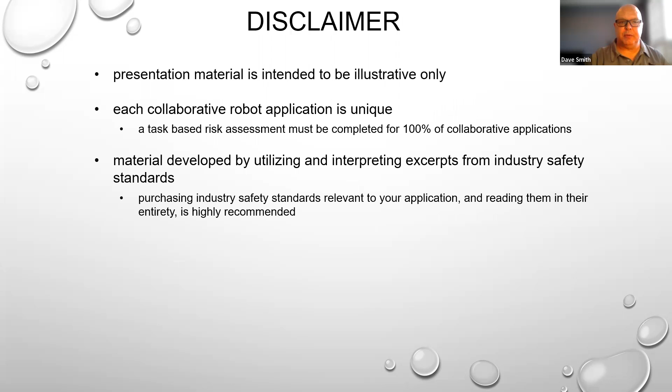Just a quick disclaimer, all this presentation material is illustrative only. Every collaborative application is going to require its own risk assessment. I developed these materials by utilizing and interpreting excerpts from industry safety standards. You're going to want to purchase those if you're going to implement a collaborative application and read them in their entirety. And check all relevant standards and regulations applicable to your robot application. Since I'm in Ontario, some of you might know, maybe you don't, we have a regulation in Ontario that requires us to have a pre-start health and safety review by a professional engineer licensed in the province of Ontario for all of our applications, cobot and other robot applications.

Just a brief history of myself. I started working at Honda Canada manufacturing in 1988. I started in production in the weld department. After a couple of years, I got a posting and went on to become the department safety specialist. Then I moved to assembly plant 2, where I was their department safety specialist. We have 3 plants there. And then I became, in the safety medical department, the corporate equipment and construction safety specialist for all of the 3 plants.

So I spent probably the last 17 years doing risk assessments, writing our internal standards, and trying to obviously make things a little safer. Since I started in 1988, we had some serious trouble. We had a lot of stuff that was unguarded. Hopefully you're not in that condition now, but if you are, there's definitely a way out of it. That's the good part.

And then after I retired at the beginning of the pandemic, I started my company called Cobot Safety, and I'm the owner and lead auditor and technical trainer for that. A little bit of my professional development: I'm a CRSP since '99, and I'm a registered functional safety technician. I am a health and safety professional. I don't pretend to be an engineer. I have a fairly good understanding of it. But if there's any questions I can't answer today, I can certainly get you the answer from other people that are on my committees.

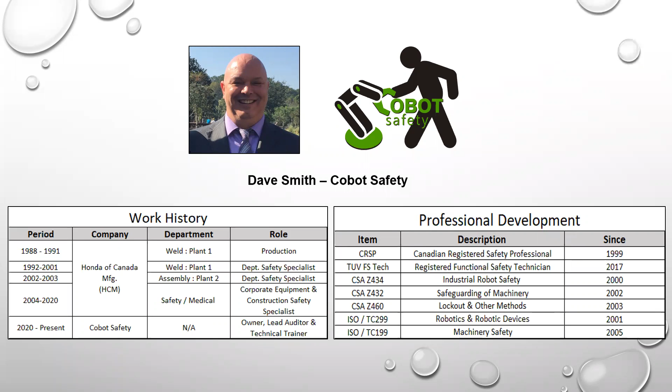So the first thing we wanted to do is just a pre-training baseline exercise, just to see how much you know about some of these items we're going to talk about today. So hopefully you can see those questions that are being posted right now by the facilitator. So the first one is, which CSA standard applies to industrial robot safety? And it's one of those. Okay, so it looks like we got a little bit of work to do, but we had 58% of the people that knew that. That's good.

And which ISO standard applies to industrial robot safety? So the first one was which CSA standard. This is which ISO standard. Okay, again, so it is 10218. Most of the people knew that, but again, this is just a pre-training baseline. So this is good. We're going to talk about that, and I'm going to give you some more information on that so you can understand where the standards came from and where they're going.

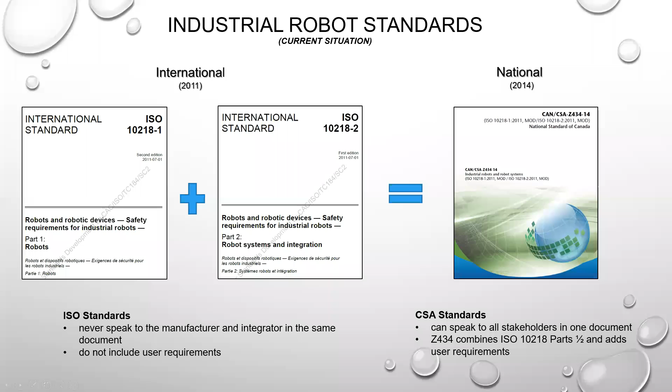Then as soon as we introduced collaborative robots in 2006, the concept of it, and when we started that, we didn't even really know on our committee, to be honest, other than some manufacturers. It was almost like writing science fiction. We didn't exactly understand what a collaborative robot application or a collaborative robot looked like. We spent most of our time writing standards to keep people away from the robots, and now the person is going to work with the robot.

So after the documents, especially part 2, was not issued until 2011, as soon as we issued those, we had a lot of questions about what is a collaborative robot, how do we implement these applications. So we wrote a technical specification that we published in 2015 that we worked on for 2 or 3 years after we published in 2011. Again, the goal is just to provide more guidance on collaborative applications. And the requirements of this are going to be incorporated into the next version.

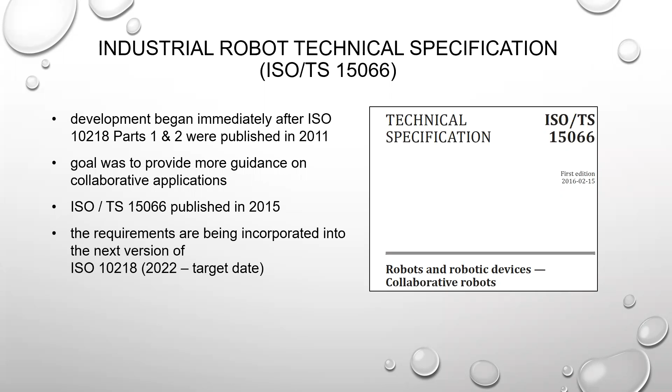And that's where I'm going to just quickly show you here. Hopefully I put these in the handout so you can look at it if you're interested, but we'll skip over it pretty quickly. Basically, the 2 parts we had now, 2011, parts 1 and 2, they're going to be combined...

With ISO TS 15066. We also wrote a couple of technical reports that only provide guidance, not requirements. So we basically took all of these documents and we put them into the next version of 10218 parts 1 and 2. Those two documents right now are at the FDIS, which is the final draft international standard. So we can't make any more technical changes, and we're hoping those are going to be out in 2022. We have, of course, had issues with pandemic and virtual meetings like everybody else.

Those two documents will come back to North America. The R15.06, the American committee, is going to adopt them, as well as Canada. And again, in North America, we're going to work with the Americans to develop user requirements.

They're going to add a part 3 to the standard, but in Canada, we're going to try to keep it all in one document, either as an informative annex or a normative annex, which means you have to follow it. So in Canada, we like to keep all of our documents and all of our parts in one document if we can, just for ease of use.

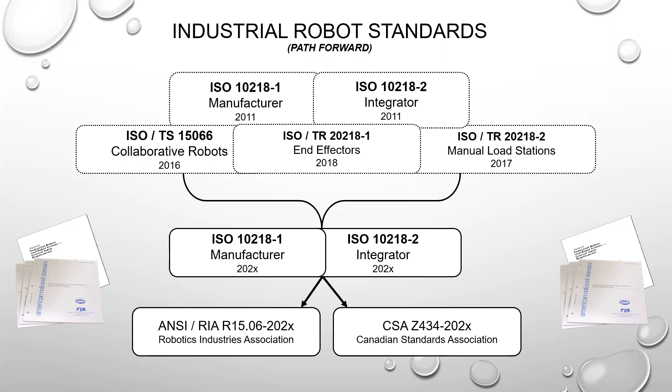So we talked about, is there any such thing as a collaborative robot or cobot? Many of you answered no, and you're actually right. This is really interesting.

As I mentioned, we didn't even really understand collaborative robots in 2003 or 2004 when we started writing this, and we continued to learn. I think the manufacturers had lots of information, but as you can imagine, with the new technology, they weren't really sharing because we have several competitors on the committee.

So we did define the collaborative robot in ISO 10218 Part 2, and we defined it as a robot designed for direct interaction with a human within a defined collaborative workspace.

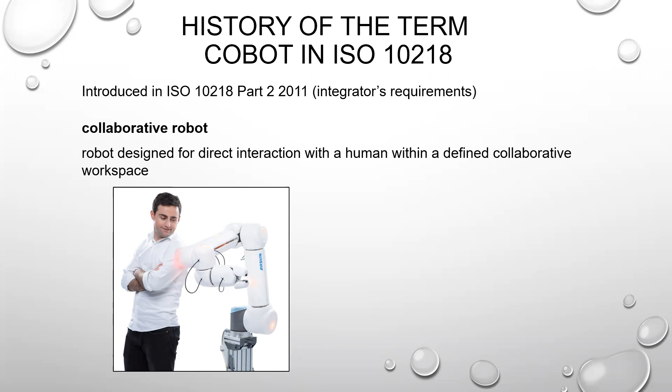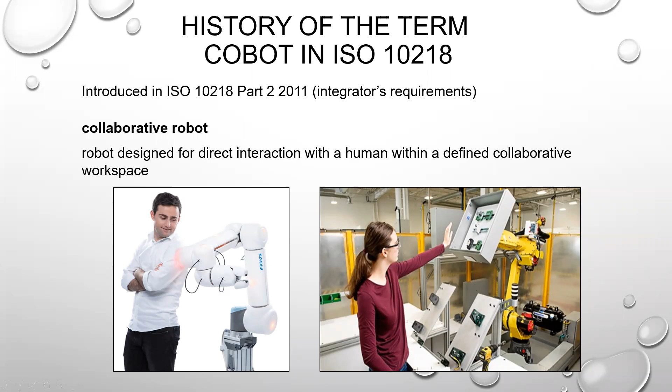It's simply a type of industrial robot. The application is critical, not the robot.

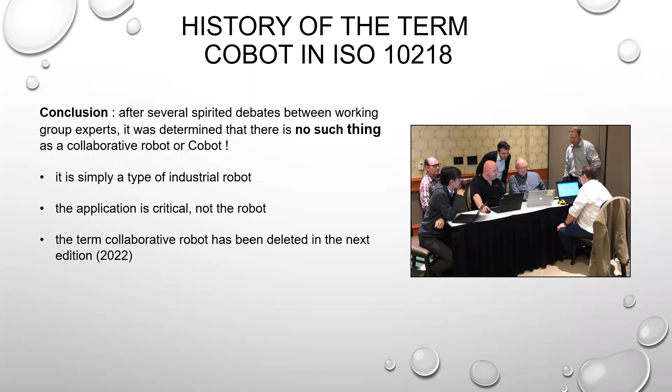The term collaborative robot has been deleted in the next edition, so we don't talk about that in 2022. I did come up with a definition that we proposed as the Canadian delegation that never made it in, but most people agree that it is probably the most apt way to describe this.

So it's really just an industrial robot with safety features that make it suitable for integration into a collaborative application. Again, that definition is mine - it wasn't accepted by the committee, but we talked about it in our meeting this week for the Z434, and most people agreed that it's an apt description. So again, it's not the robot, it's the application.

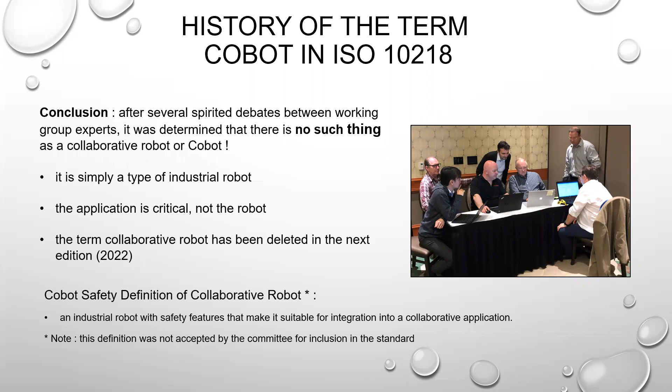There were some key points in TS 15066 when it came out. The robots utilized in a collaborative manner must comply with Part 1 and Part 2. So the robots themselves are manufactured to Part 1, and then the integration has to meet Part 2. This specification was developed to supplement and enhance those requirements.

It provides additional guidance with respect to collaborative operations. There are 4 types we're going to talk about, and it also introduced threshold values for power and force limiting applications.

We're going to talk about that because that was one of the biggest things when we started discussing collaborative applications. Somebody said, okay, well, how hard can we hit somebody with a robot, or how much force? And then of course that would depend on the body part that you hit and all kinds of different things.

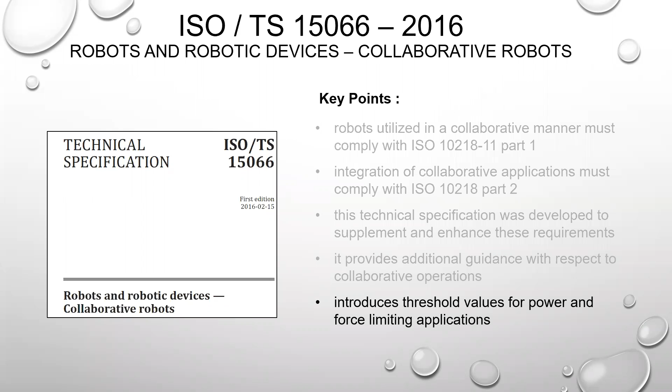So as soon as we introduced this, there was a lot of big companies, including Honda - that's why we're participating - and Mercedes and other companies around the world in automotive that really needed some additional guidance. So that's why we created this.

The collaborative robot's industrial design and operational characteristics are obviously much different than those for a traditional installation. The operators work closer to the robot. You can have intended or unexpected contact.

Those can actually be intended. So if it's a power and force limiting robot or a hand guided application, we're going to be right up close to the robot, even moving it around by hand. So obviously that contact is expected.

And the risk reduction measures had to be determined in a risk assessment. Risk assessment is always important.

I think anybody that understands safety nowadays understands that almost every standard, every workplace, every government regulatory authority always wants to see risk assessments, because there's a lot of value in doing them, and doing them as early as possible.

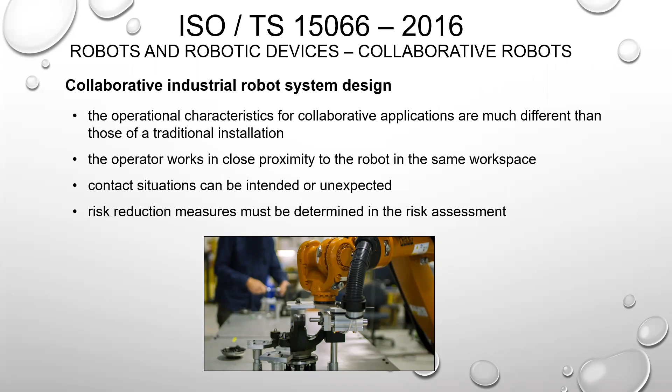With a collaborative application, it's absolutely critical because, as I mentioned, there's no prescribed method to follow. Every application will kind of rise and fall on its own merits according to the risk assessment.

So there are 4 types of collaborative operation: power and force limiting, speed and separation monitoring, hand guiding, and safety rated monitored stop. The two that are most prevalent are power and force limiting and speed and separation monitoring.

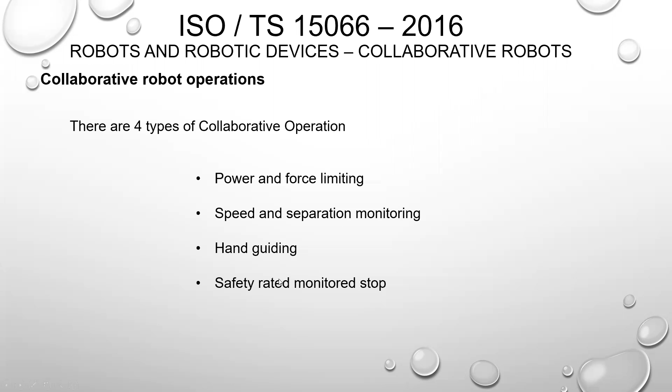We'll talk about all of these types. So the first one here is power and force limiting. I'll just show you a quick video of a polishing application.

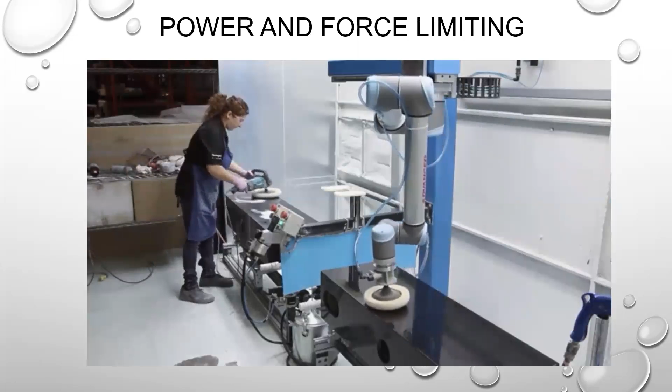This is a universal robot. I'll show a few of these, but I have no ties to any robot manufacturer or anything - they happened to provide me with some videos and I was able to get some offline. So these are just illustrations only.

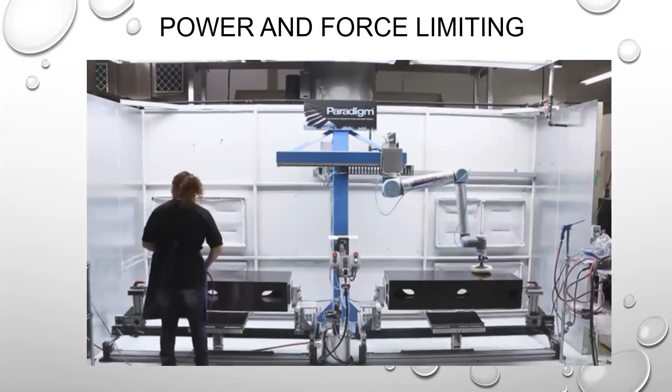But you can see that the person can work in close proximity to that robot. We're going to show that in a risk assessment, and after that we'll have a brief question break, and we'll talk about that a little bit more.

So with power and force limiting, physical contact can occur between the robot and the operator, and again, it can be intended or unintended. There are two types of situations for contact that we talk about in TS 15066: quasi-static, so is somebody going to be pinched or clamped, and transient contact, which is more dynamic contact where they can retract and recoil. We'll talk about that because the force limits are different. So contact can occur in intended situations, unintended contact caused by an operator, or unintended contact due to a technical failure. Those are the things we need to consider.

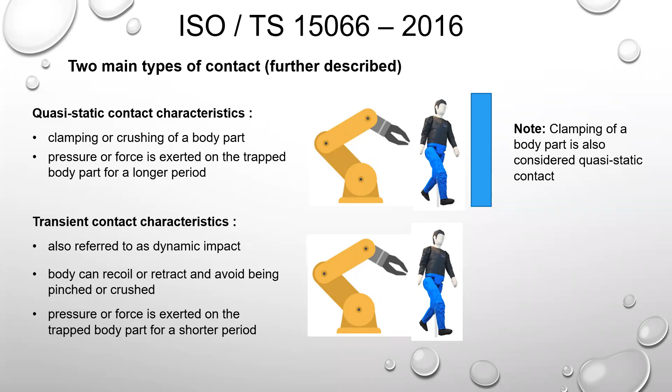The risk reduction measures to prevent the contact between the operator and robot - basically the key is to ensure the contact doesn't result in harm, because as we already said, it can be intended. So we have to identify all the conditions that could result in contact situations. The standards always ask you to look for things that are intended or reasonably foreseeable. Reasonably foreseeable is kind of a vague term, but basically anything that you could reasonably foresee going wrong - how would we protect the person if that happened?

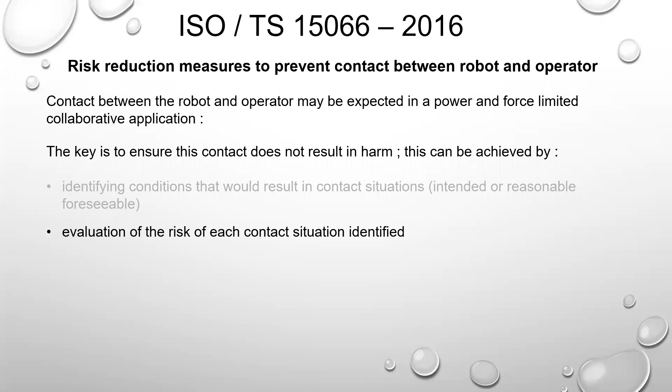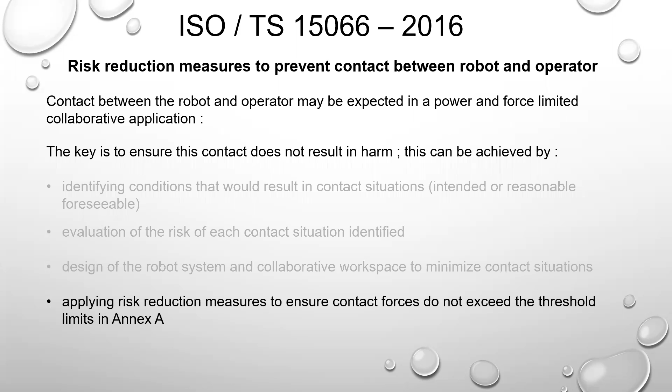Evaluation of the risk of each contact situation. Design of the robot and collaborative workspace to minimize the contact situation - this goes back to the design stage of our risk assessment. That's really critical, and we have to apply the risk reduction measures to ensure the contact force doesn't exceed the limits in Annex A. We'll talk about those when we get to that.

Force gauges are how we measure the force. This is important - once you measure the force, you have to make sure that it meets the guidelines in our table. I'm going to talk about it a little bit later, but if I forget to talk about it, I want to talk about it now.

Change management with all of the programmable safety systems - and this goes to any type of automation. When you're using safety PLCs now, and we used to mix machine and safety functions together in the same PLC, we had one of our operators get his head pinched between a jig and a lift. Luckily we were able to lift the jig up against the force in the air cylinders to save them. But that was a result of us mixing machine and safety functions in a standard PLC and having everybody, all our maintenance people and engineers, have access to them.

So we had a near miss. Somebody went to change some parameters and created another condition which said bypass the light curtains when all these conditions are met, and this person was in the way. So that's what happened - we almost killed a person. It becomes so critical when we start talking about collaborative applications.

So if I'm going to set all these power and force limits, in Ontario I need a pre-start engineer to come in and validate that. After I validate it, I have to make sure that nobody changes it. So at Honda, we started what we called a safety device alteration procedure, where management would have to initiate a change to any programmable safety feature or device, or even hard guarding.

Then two authorized people would have to make the changes, and they'd have to be approved by device because we had different types of safety PLCs. So anyways, we went pretty far with that, but that allowed us to do change management, in particular with pre-start health and safety reviews as well. We didn't want to have to keep calling the engineer in, so after we validated it, we wanted to make sure - but just a very critical point, because all of the safeguarding now, a lot of it with programmable axis limiting for robots and stuff, is invisible. So if something happens or changes, the operator won't know until something goes wrong.

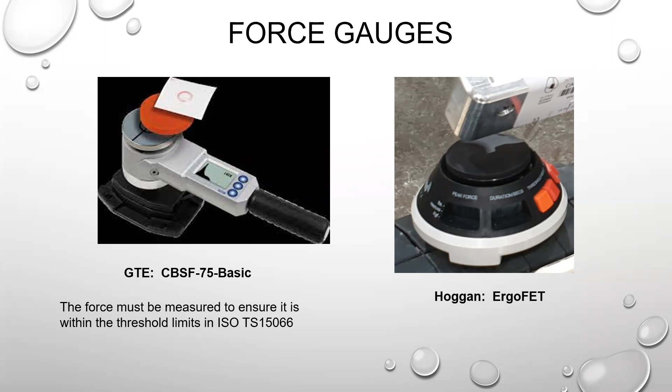This is just a quick example of a collaborative application that we did at the Toronto Auto Show. The interesting thing is that we actually approved the application in our safety group, and I have a few members from Honda that were on the committees with me, so we all had an evaluation of it. We selected a couple of robots that were URs, but our engineering group found a deal on some other robots and bought those. When we came back from our ISO meetings, we realized they had selected the wrong robots and they didn't have the right features to use in a collaborative application. So we had to send them back, and we proved that out by showing our risk assessment to our senior management team, and then they agreed.

So the kids could come right up here. They put the magnetic stickers right onto the robot, and then the robot would go over and put them on the car in whatever pattern the kids were selecting.

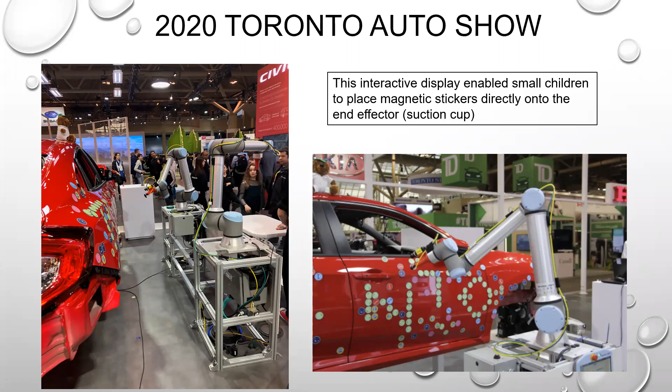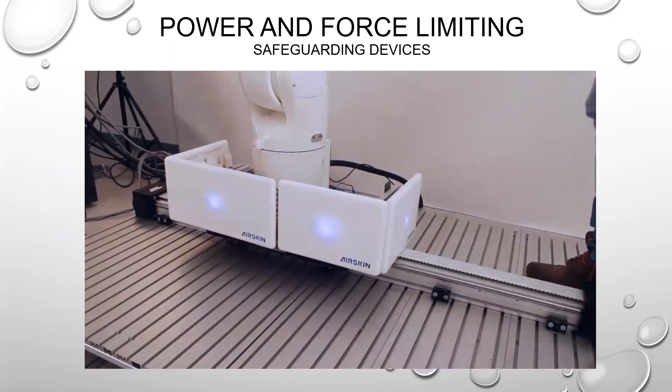This just shows a quick video on some power and force limiting safeguarding devices. Again, I have no relationship to any of these people, and I don't know how often you would use these. There are probably other ways to do this as well, but if you're going to have contact with an operator, you could use this Airskin.

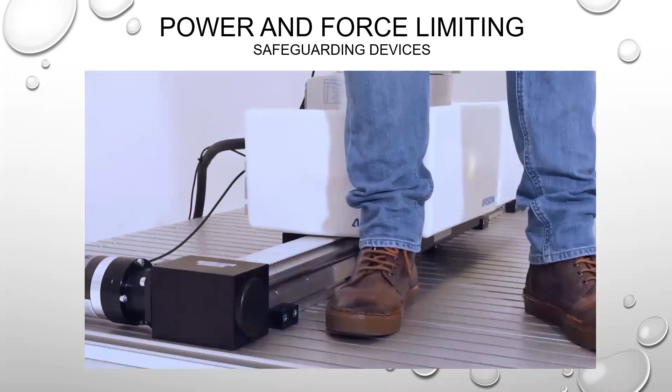Those devices go right onto the robot. That was showing it on the additional axis where you can stop it on the transfer, but they can also be connected to the robot. We did bring this into Honda to try it out, just to see how well it worked. We didn't actually have one in operation, but it reduced the contact forces from about 100 newtons down to 20. So it definitely works, it's all safety rated. There's an additional cost to it, but if you really need the robot to go faster where you can't meet the other contact forces, then there are different ways to do this.

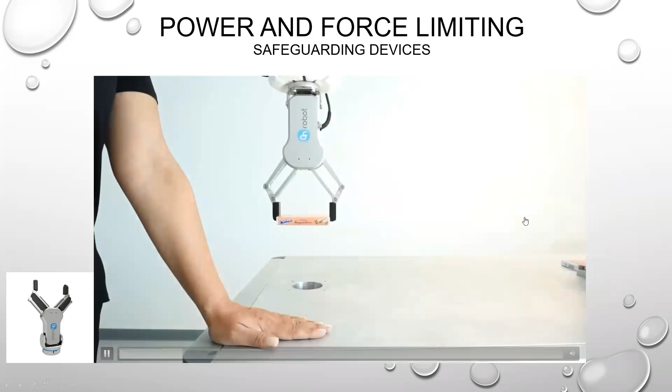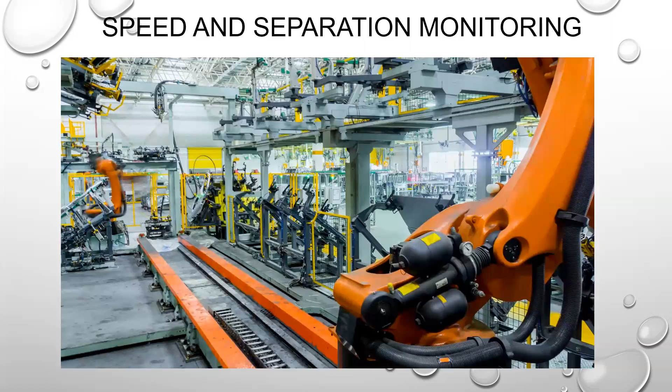I'm going to go a little quick because I want to get through to the part on risk assessments as well. So this is one on speed and separation monitoring. As I mentioned, power and force limiting that I just showed, and speed and separation monitoring, are the two key ones.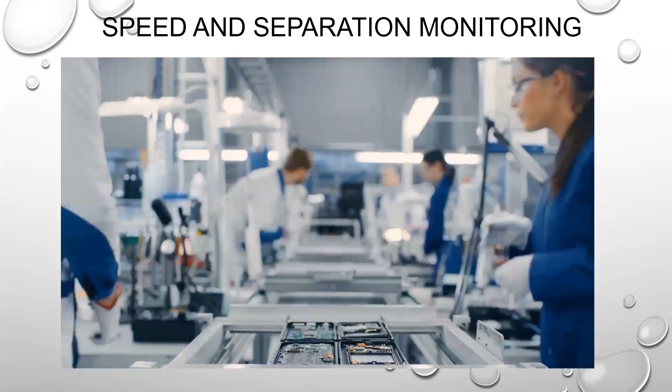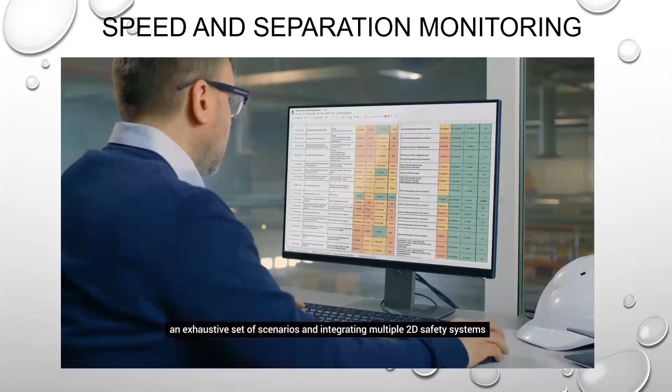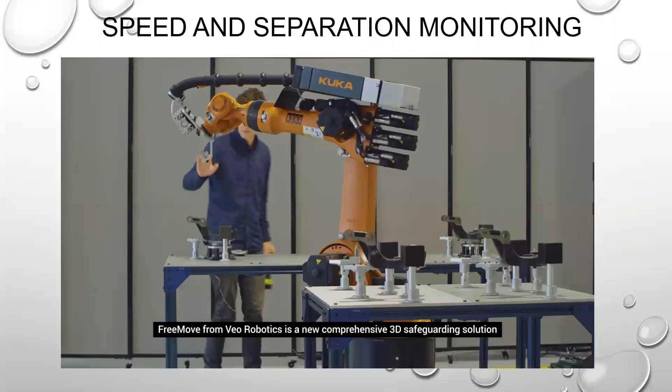Manufacturing applications that need the speed and strength of industrial robots also need the dexterity and versatility that only people can provide. The challenge with human-robot collaboration is how to effectively and efficiently safeguard these work cells. Ensuring robotic work cells are safe for human entry can require considering an exhaustive set of scenarios and integrating multiple 2D safety systems to cover all the places where a person could go. This adds time and complexity at every stage of the process. FreeMove from Veo Robotics is a new comprehensive 3D safeguarding solution that makes work cells with human-robot collaboration safer, easier to design and integrate, and more flexible than previously possible.

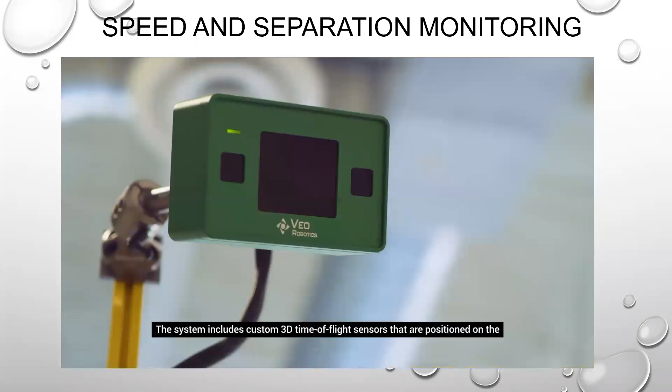The system includes custom 3D time-of-flight sensors positioned on the periphery of the work cell to capture rich image data of the entire space. The FreeMove engine uses this 3D data to identify the work cell, including the robot, workpiece, human, and occlusions. It then tracks and calculates all possible future states. And if a human is closer to the robot than the protective separation distance, FreeMove signals the robot to slow and stop. FreeMove will automatically determine when it's safe for the robot to restart.

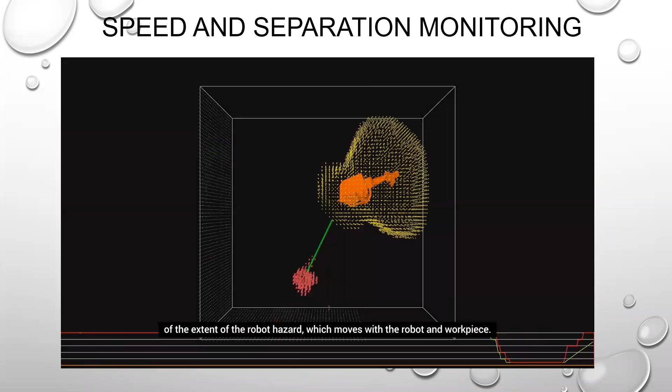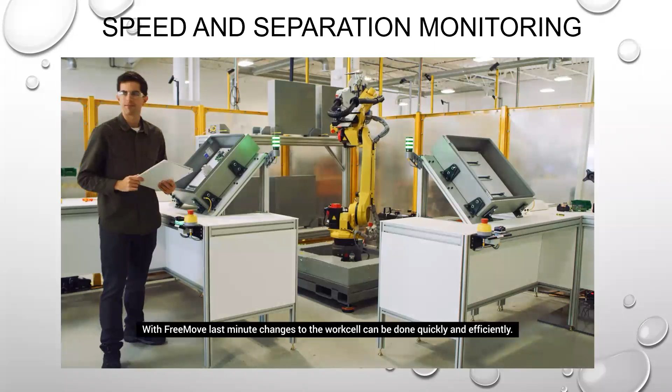By monitoring the entire work cell in 3D, FreeMove ensures that the robot operates safely in any scenario while simplifying the design and risk assessment process. FreeMove's real-time understanding of the space enables dynamic computation of the extent of the robot hazard, which moves with the robot and workpiece. It's calculated for you, eliminating the need to create custom spreadsheets with complicated geometries. With FreeMove, last-minute changes to the work cell can be done quickly and efficiently. Perform a simple backgrounding step in FreeMove's configuration software, and FreeMove figures out the rest.

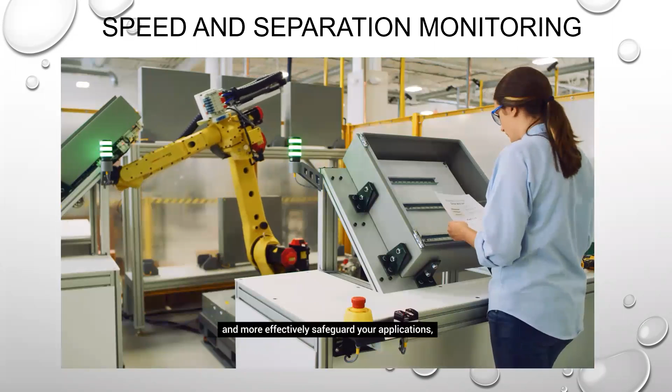Again, I'm not associated with anybody—that person is actually on my committee from Veo, so he provided me with some information. But this is really interesting because it shows how this is basically a traditional robot you can use, and it has features that make it suitable for integration into collaborative applications because it has safety-rated monitored stops and all the different types of features it needs, including programmable access limiting with dual check safety. This is a FANUC robot with dual check safety on it.

And that's why we got rid of the term cobot, because really it's just the application. So again, the operator and robot, as you saw in the video, they can move in the collaborative space at the same time. The risk reduction is achieved by meeting the protective separation distance formula that we have in our standard.

And this is a really slick application, even though I think when we first priced them at Honda, they were about 40,000 US. But depending on the size of your cell, you're also eliminating the need for your perimeter guarding, which is quite expensive by the time you buy it and have contractors install it, for us anyway. And you're also reducing the footprint of the cell, which is probably the biggest thing because space is always limited. It can be used with any type of robot as long as that robot meets part 1 of the standard and has all the safety features.

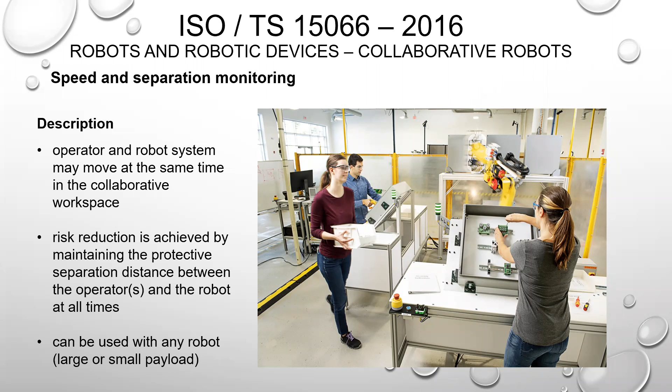This one I just wanted to show you quickly—it's in the handout, you can take a look. This is our speed and separation monitoring picture. It relies on knowing where the people and the robots are, of course. This one, I really like how they do it—they measure right from the end of the workpiece. Using the protective separation distance, the person can wander anywhere, and the robots, because of those 3D high-speed cameras, can tell where the person is.

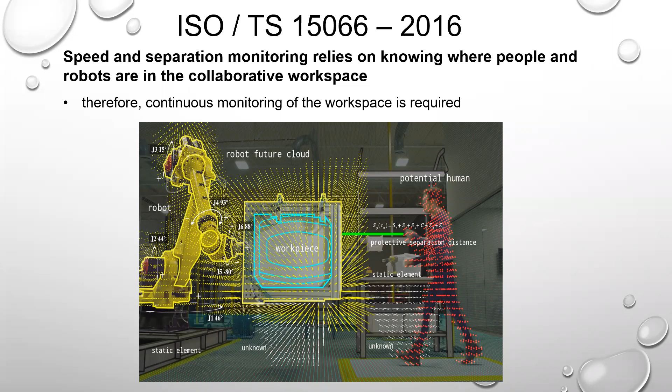There had been some iterations of this before—I think Pilz had a SafetyEYE, but it never really worked. This one I don't talk too much about in this presentation. I do have a 4-hour course where I go through this stuff in more depth, but this is just showing the protective separation distance.

I just mentioned earlier as an anecdote that when we went through this part of the standard, we had scientists from ABB, KUKA Robotics, and a bunch of others go through it, and it was really painful to watch all these formulas develop. But in the end, we came up with something that was really good.

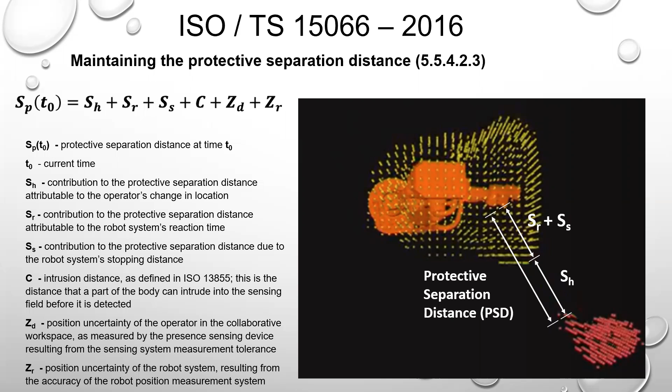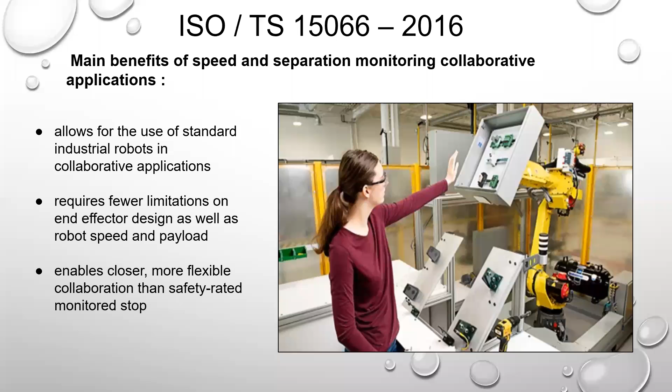Again, we've already talked about this, but you can use different limitations, or have fewer limitations on your end effector design as well as your robot speed and payload, because some collaborative applications—especially power and force limited—when you're in the proximity of the robot, they have to move very slowly, else you're never going to meet the thresholds. This one allows them to go a little faster, and then as you get closer, it slows down to the point where it could stop in time.

Again, it's the responsibility of the integrator to make sure these are put in—and if you're doing your own integration like we did at Honda, then it's up to us. But really, they have to make sure that all of this technology is third-party certified. TUV is an independent testing laboratory that tests all these devices and makes sure they meet the requirements in ISO 13849 for functional safety.

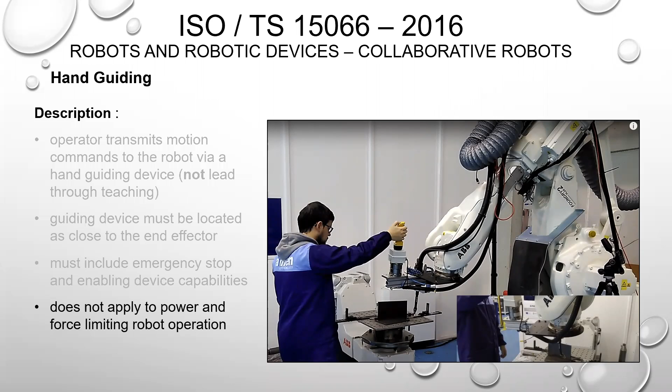This just talks about the operator sequence. Once you go in there to the collaborative workspace, it has to issue a safety rated monitor stop. And then the operator can now enter it and take control of the robot. Anytime they release the guiding device, it initiates a protective stop.

So a protective stop is just a stop that retains the program logic to facilitate a restart. So it is a safety function. And then once the operator exits the collaborative workspace, the robot can resume automatic operation.

These are just hand guiding considerations, and they are in your handouts. So just for sake of time, I'll go through them really quickly. But basically, again, the proximity of the robot, you have to ensure the process doesn't require the operator to put themselves in a potentially hazardous location. So under the robot arm or between the robot and the workpiece. This is, again, all determined in the risk assessment. And the earlier you do the risk assessment, the better off you're going to be.

And again, the operator has to have an unobstructed view of the entire cell to make sure nobody else enters. And the intended motion of the robot has to be intuitive. So it can't surprise the operator. He has to know where it's going to go, and it has to be controllable from his guiding device, which is his enabling device. And that enabling device, for people who don't know, is 3-position. So if I squeeze it too tightly or I release it, it stops the equipment.

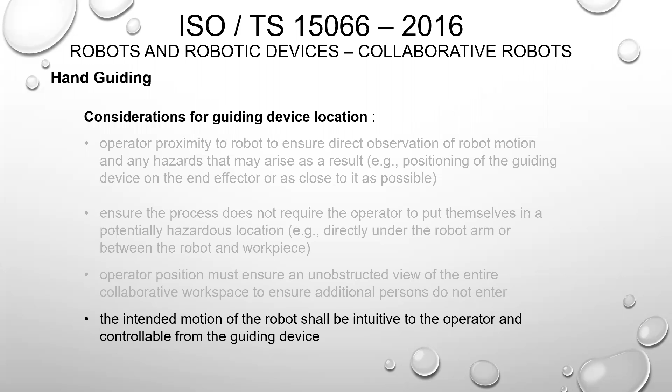There used to be a term called dead man switch for a 2-position switch. And there was actually a person in the US in the early days of robotics that actually gripped one of those, but still got crushed between a bollard and the robot. And the coroner actually had to remove the enabling device from their hand. So that's what started the premise for the 3-position enabling devices, and they've been around for quite some time now.

The last one is safety rated monitor stop. And this one I'll really quickly go through because it really doesn't apply that much anymore. So it's not a collaborative function on its own, we determined. We used to have lots of cells at Honda where the robot would put the part into the jig, and we used to have to lock down the wrist or turn off the drive power.

So this is going to go away on its own as a type of collaborative operation in the next version. But for safety speed and separation monitoring, if you get too close to the robot, it has to issue a safety rated monitored stop and protective stop, which is a safety rated monitored stop. And the same thing would be for a power and force limited operation. It's also part of hand guiding. As you mentioned, the robot has to stop when we go in and hand guide it. So that would be another area where we have safety rated monitored stop.

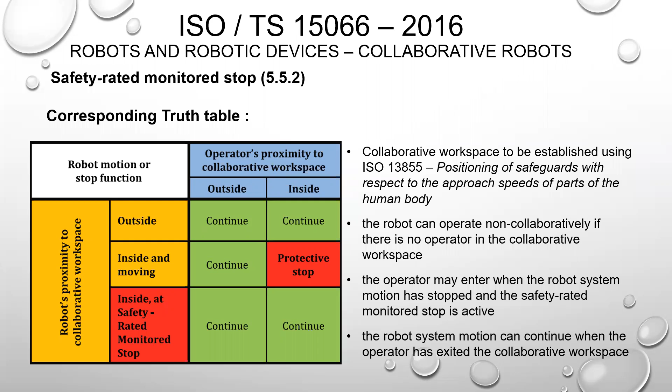This truth table just talks about the robot motion or stop function and the operator's proximity to it. It's all based on ISO 13855, which is positioning of safeguards with respect to the approach speeds of parts of the human body. And again, the robot can operate non-collaborative if there's no one in the space. Once they enter the space, the robot has to make sure that we provide a safety rated monitored stop, and the robot system motion can continue when the operator has exited. So basically, it can start automatically.

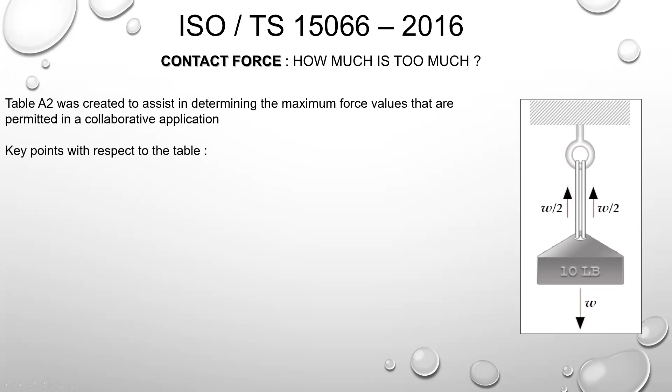This one is the table. So we had to create some values for how hard you could actually hit somebody. Our study is not perfect. It was conducted in Germany at the University of Mainz. It gives values, and they're based on pain thresholds, not the onset of injury.

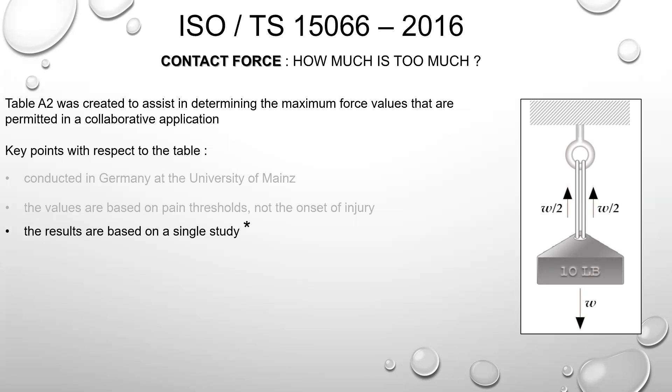So we had this discussion quite frequently because the numbers, because they're just based on pain thresholds, are very conservative. So they're not very high, and there's been some concern about that, but that's the studies that we have for now. And again, the results were based on a single study because we didn't have anything else to go by, and it was only conducted on 100 healthy adult subjects. So that's a really small sample size, but that's all we could use.

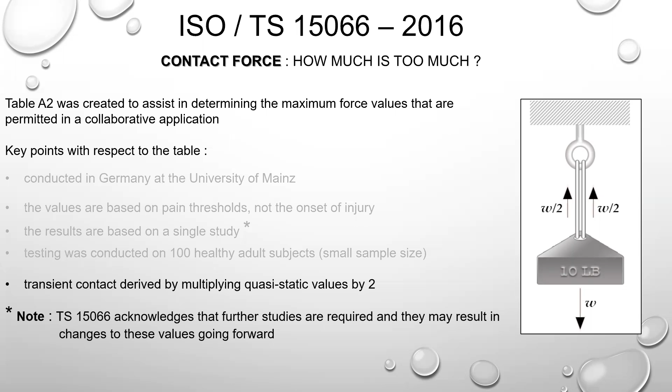Now, transient contact, I'll show you in the table. Basically, we just took the quasi-static contact values. That's what the test was based on, and we multiplied them by 2. That was based on a literature study. We say right in the documents that we acknowledge further studies are required, and they may result in changes to these values going forward as more studies and more information becomes available. But as you can imagine, a lot of the studies are based on funding and different things like that, which kind of slowed us up, but at least we got something.

So you obviously have to think about that when you're doing your risk assessments. That's why the shape of your robot, all of your clamps, everything else, if you're going to use them in a power and force limiting application where contact's expected, then you have to make sure all the components of the robot can't create a hazard.

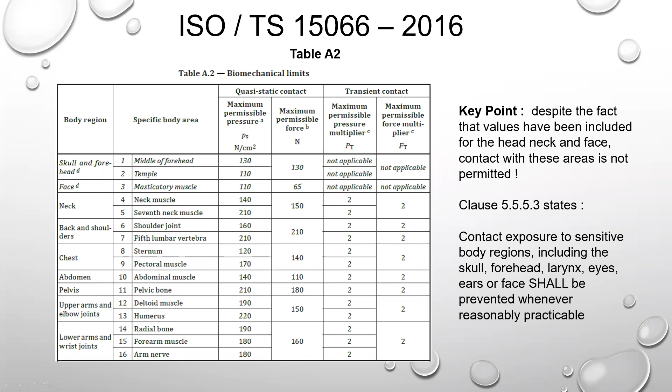It does provide some values here for the forehead, the temple, and those different sensitive regions, but we actually state in the standard: the contact exposure to sensitive body regions shall be prevented whenever reasonably practicable. And again, reasonably practicable, I always call those terms specifically vague. We meant to keep them vague, so they provide you some guidance, but also a little bit of leeway. It's very difficult to gauge whether somebody could be hit in the head or the face, because you never know what the person's going to do. But again, you use these values as a guideline and it'll help you to get to a safer application.

A couple of things that have changed quickly, and then we're going to switch to some questions. Safeguarded space: for anybody that knew the old definitions, the definition of safeguarded space used to be the area defined by the perimeter guards. Those could be hard guarding or light curtains or anything else that's an electro-sensitive protective device. But that wasn't going to help us for collaborative applications where there are no perimeter guards.

So we changed the safeguarded space to the space where safeguards are active or where the perimeter safeguards provide protection. So this now also says if we have a power and force limited robot and all of the features are active, then we can say that's the safeguarding, and the safeguarding is active. And that's why the people can get closer to the robot.

We used to have manual high-speed attended program verification. I like to include these because they're very important to me personally. We had a couple of very serious accidents in our Honda US sister plants with people getting squished by robots. One person was walking out of the cell. Two of them were teaching at high speed.

As he walked between his robot base, the other robot operator didn't see him, swung the robot around in high speed, squished him up against the other robot base, and he had to get airlifted to Ohio State University Hospital. We changed right then. That was back in about 2003. We disabled T2, high-speed teaching, on all of our cells, so you couldn't do it from inside or have attended program verification.

Then we had another accident at one of our Alabama plants where somebody down there was teaching at high speed. And I knew that because our teachers had gone down to support them, and they were kind of surprised at how they did some of their things and the speeds they taught at. And then one of their operators broke some ribs and punctured a lung after he was struck by a robot. So going forward, we're changing that in the standard where high-speed teaching and program verification is only permitted from outside the safeguarded space in manual mode.

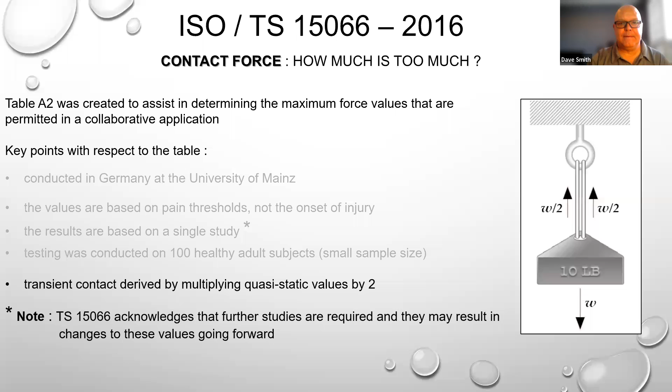That all depends on the slide that I showed. There was a welding application. So that was a hand-guided welding application, but it all depends on the application. So we also have welding robots at Honda, MIG welding and I think TIG welding, that happen inside a safeguarded space where nobody's around them. So again, it all depends on the application. But the slide that I did show, and I'll just quickly go back to it here. Sorry.

So this one right here, this is actually a welding operation. So this one would be considered a collaborative operation or application only because the hand guiding device is right on the robot. But I could still have a robot, like I said, a MIG weld robot. We had several of them in our weld department at Honda. They were all inside a safeguarded space and none of them were collaborative applications.

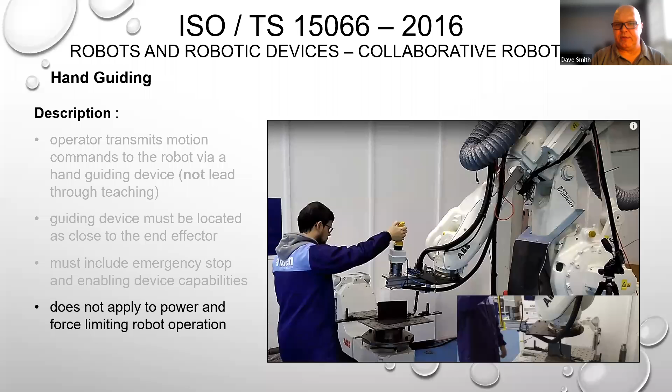Okay, perfect. Another question: ISO TS 15066 is also called collaborative robots in that specification. If 15066 is included in ISO 10218, will that title also be removed in the new revision? Yes, and that's interesting. I'm glad somebody caught that. As I mentioned, it was so difficult when we first started this because we really didn't know what a collaborative robot looked like.

The main part of TS 15066 that we're going to bring over is definitely the pain threshold table. So that will be in one of the annexes for our standard in the 2022 version. 2022, perfect. And the last one before moving on: how do you consider unintended contact consequences in the risk assessment? Sorry, can you say that again? How do you consider unintended contact consequences in the risk assessment?

And that's very difficult, as you can imagine. I think, again, it's going to be based on whatever the application is. If I have an application where somebody is going underneath the robot, then I probably have to consider whether or not that robot arm could fail and a bunch of different things like that. If I design my application to keep the person out of the way in the event of any failure, then I'm probably okay.

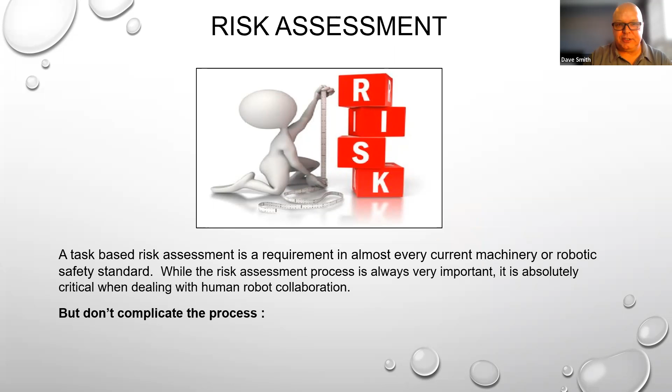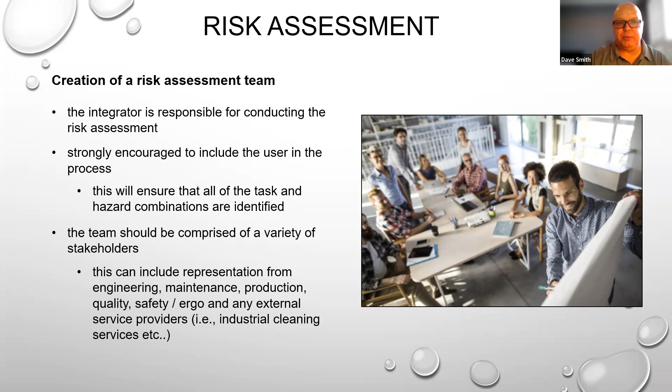It's a risk assessment—it all comes down to a task-based risk assessment, not a risk assessment program, so I won't go into that too much. Create your team, make sure you have all your stakeholders. We started this at Honda in 1998, did it on a whiteboard, and had a lot of success because we did it very early in the process. The earlier you do this at the design stage, the more likely you are to actually implement all your safeguarding effectively.

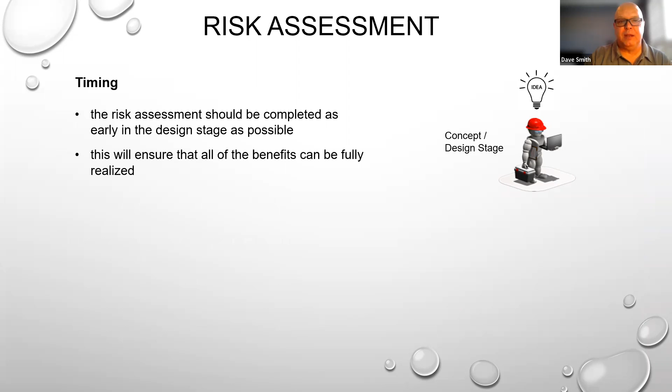One of our operators asked if we could bury all the cables on a new line—this was around 1999, right after we got rid of all our hydraulic robots, so we had lots of cables on the floor that people could trip over. We couldn't bury them, but the engineer said we could dig trenches, put forms in the concrete since it hadn't been poured yet, run the cables through, and cover them with expandable metal anti-slip covers we could remove if needed. That's a good example—if we hadn't started that right at the beginning, it would have never happened. It would have been way too expensive.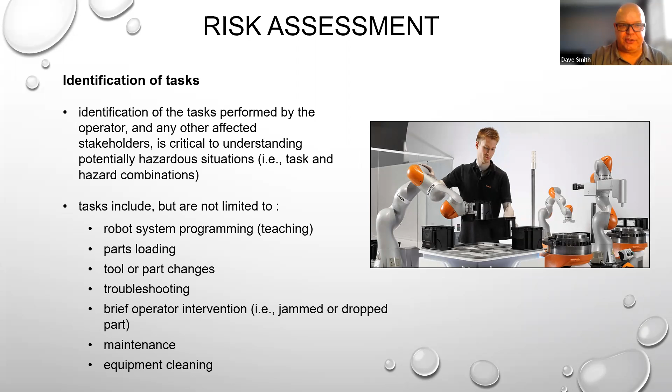So get all the people together—I'm a big proponent of collaboration between engineering, safety, and all the additional stakeholders like maintenance, everyone who could be affected. You want to identify all the tasks. You'll see some of these in your handouts—things related to robots and collaborative robots, but there's all kinds of different tasks. You want to consider operator intervention, maintenance, even equipment cleaning.

As most of you probably know, the hierarchy of safeguarding—once all the hazards are identified, we want to start at the top of this matrix. We want to use elimination of the hazard, or substitution if we can. I remember we went from lead-based paint to water-based paint—that was an example of substitution. We also tried to go from lead-based solder to non-lead-based solder for repairs on our side panels, but that didn't work, so we just eliminated that process altogether. If we had a flaw on a side panel, we would just change it completely.

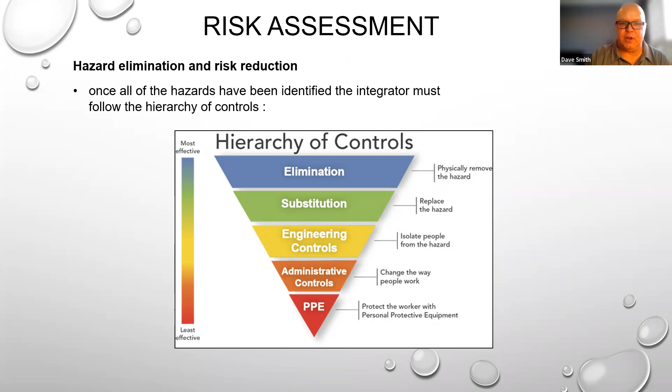The methodology I use for risk assessment originally came out in 1999 in the R15.06 standard, and it's been updated over the years—now it's TR R15.306. I use it a lot for robots, but it can be used for anything. We also refer to it in CSA Z432. We never tell people what methodology to use, but it has to meet certain parameters, which come from requirements in another document called ISO 12100.

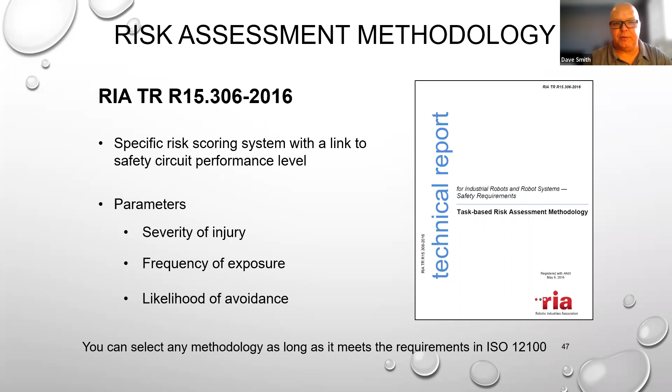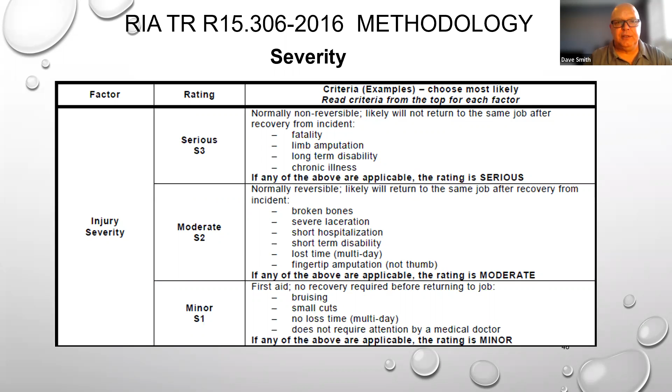In this methodology, we added additional categories for severity. We used to only have two—either first aid or fatality. Now we have moderate in the middle so we can do a more reasonable evaluation of the risk. We have exposure with the same approach—we added another category. It used to be less than once per day or shift, or more than once per day or shift. Now we also consider whether we can prevent exposure to the hazard, which in a lot of cases we can, so that's our third choice.

The other factor is avoidance—we want to make sure that if there is an incident, the person could get out of the way. Some of you may remember this: 250 millimeters per second is the magic number. That's considered slow speed, and people can get out of the way, so they have a higher likelihood of avoiding that hazard.

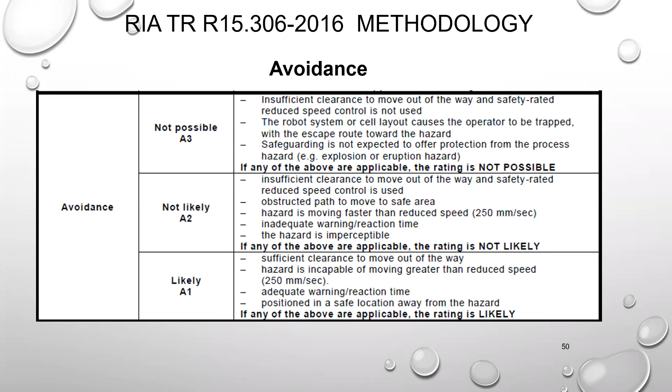This goes into this table here, and I just want to show you this quickly because I do want to get into a couple of the collaborative application ones. But if we have a serious injury and we have low exposure, it doesn't matter if we're likely or not likely to get out of the way, we're going to actually have a high risk. Okay, so if the robot's moving, it doesn't even matter how fast it's moving.

If I was teaching the robot, we always assume there's no safeguards initially, so the robot can kill me. I'm going in there, it's low frequency because I should only be teaching my robot less than once per day or shift, unless I have a huge problem. And we don't do the risk assessment based on commissioning where we're teaching for 8 hours at a time. We do it on regular production, and we do have requirements for commissioning as well.

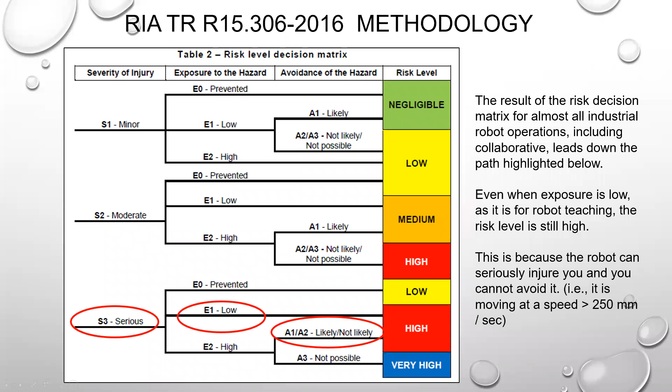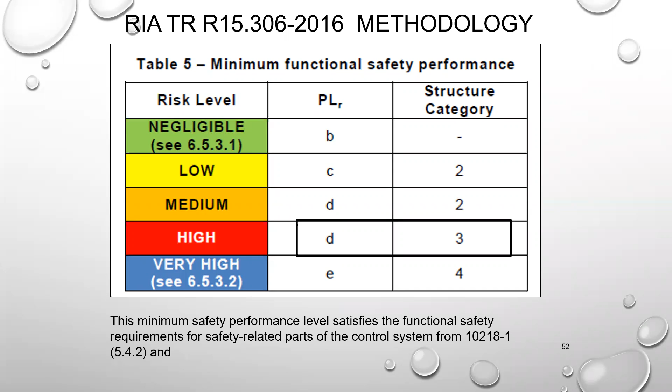And then likely, not likely gives you a high. The good thing that I like about this methodology is that if I have a risk level, it equates to a performance level required, so PLR is the performance level required. This all comes from ISO 13849 as well, and we've adopted it into our standards. So anything that's high is going to be PLD structure category 3. Some of you maybe remember this as control reliable or dual channel with monitoring, but either way, it has to detect a single fault before the next demand on the safety system, so that it's a safe condition if we have anything go wrong. So almost all the robots that you're going to see, whether they're in our document or any other, they should all be PLD category 3 because they all pose a high risk when they're not safeguarded.

R15.06 methodology, or .306, gives you a methodology for how to evaluate the risk. When I retired from Honda, I had one of our engineers, a young guy there. I hired him to build me my own functional template that I use now.

I just want to go over a quick one. I've already showed you the video for this one. This was the polishing application, and I just wanted to show you how we would put that into a risk assessment. So the first thing we're looking at, obviously, we have all these different tasks. For the purpose of this, we're only going to look at probably one of them, just because I'll have to go a little bit quicker here.

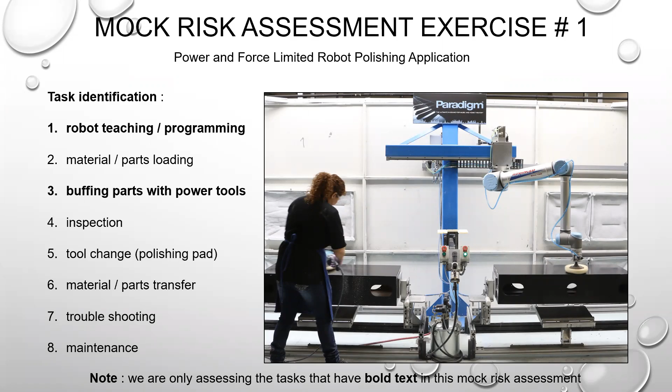So again, when you're doing a risk assessment, you have to assume that there's no safety when you do the first one. That's the same as every risk assessment methodology. You always start out assuming that we have no safeguarding. So if I'm looking at the robot programmer, the hazard type is struck by the robot. We don't want them to have unintended contact between the operator and robot during programming, transient contact, and we don't want the operator pinched between the robot and the buffing table during the programming.

That's quasi-static. If we go through and evaluate this, you can see that we have a serious injury because we could definitely kill somebody with an industrial robot if we don't have any safeguards. The exposure, again, because they're programming, is low, and the avoidance is not likely because the robot is still at high speed. So again, it's not likely, not possible. The other one, that's for explosion or eruption and stuff that you physically can't get out of the way of no matter what happens. But this one would be not likely. Still comes out to a high, PLD structure category 3.

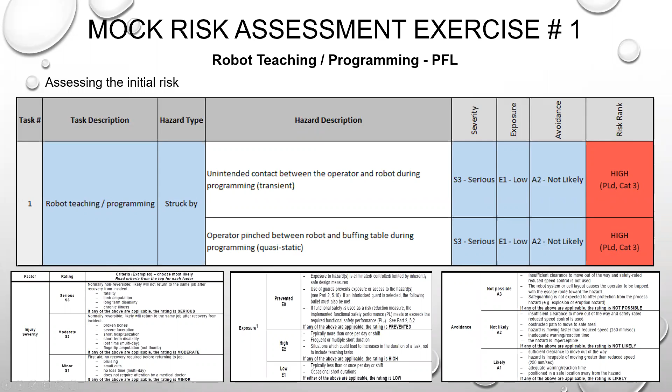Then when we put in our risk reduction measures, now we have to put in all our risk reduction measures and go back and look at this again. So if I'm going to utilize a robot that has power and force limiting capability, that's compliant with ISO standard, that's one of my things. As I mentioned, our Honda risk assessment for the collaborative application we did, when they didn't use a robot that complied with part 1, it totally stopped us in the risk assessment because we were able to show, hey, that's the type of robot we need. So we actually had to incur a cost of sending back the wrong robots and buying some new ones.

The good thing at Honda is we had a very strong safety culture, and once we showed our reasoning for it, it was a no-brainer, especially for an auto show where kids are going to be around. So we definitely change that: ensure the teach pendant is active during programming if required.

So the safety rated limiting functions are not active, and the risk is not reduced by inherently safe design. If I have an inherently safe design in my robot, where all of my safety rated limiting functions, like power and force, are already active, then I can do it. But normally they're not. So I want to ensure that all those are active, and if they're active, then I'm good to go.

So I'm going to make sure that they have a teach pendant with a 3-position enabling device. We're going to make sure that all the teaching is done at slow speed, so we're not going to teach it at anything higher that's not avoidable. We're going to design the collaborative workspace to minimize unintended contact between the operator and the system, and we're going to clearly identify the collaborative workspace with floor markings.

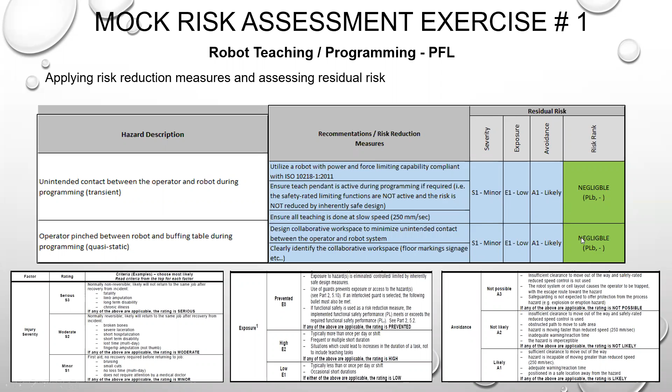The last thing I'll mention is that you have to make sure when you do any risk assessment that you complete the risk assessment. I first did audits of our risk assessment program after we started, and departments would report that their risk assessments were all complete. But when we checked deeper on our audits, we'd find that not all of the responses, not all of the countermeasures were actually completed. So we put another system in to check for all that stuff.

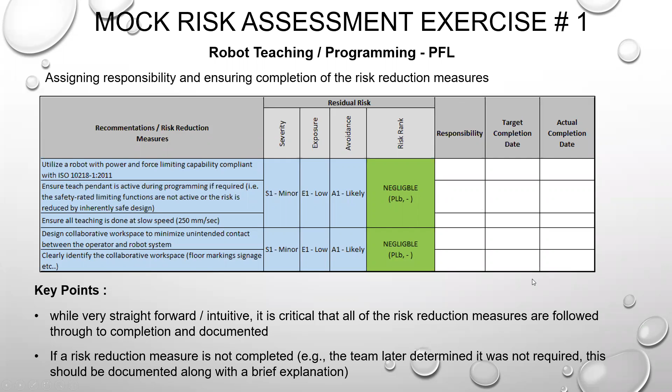And I know I'm getting very close, so I'm just going to skip through a couple more slides here. These will be in your handouts, and I apologize - as I mentioned, I took a 4-hour presentation down to 45 minutes, and I guess I kind of missed the timing a little bit. But you can take a look at some of these.

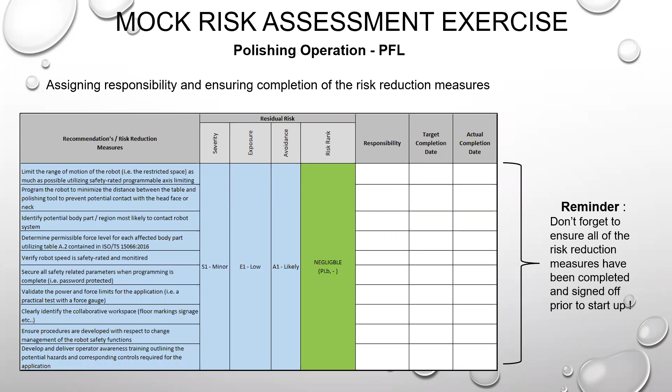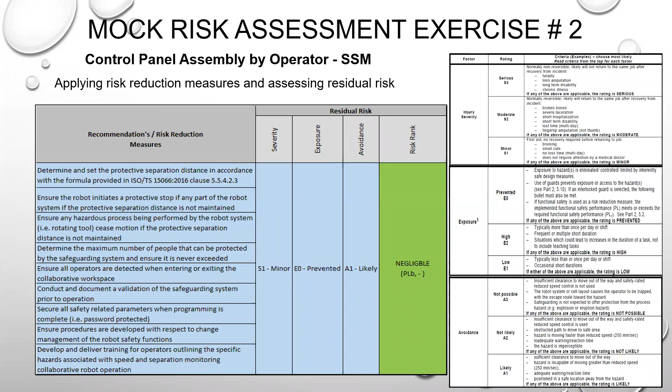I also show that for a speed and separation monitoring application, when the operator has to assemble, and all of the different things you would need to do to reduce that to an acceptable level. As I mentioned earlier, probably the most important thing is that when you do a risk assessment, you have to make sure that all of the controls you put in, especially programmable safety, have a strong change management system to make sure nobody changes those.

Okay, sorry Shane, I know I probably went a little bit longer there, but I don't know if we have time for the last knowledge confirmation or not. That's up to you, I would say. Dave, it's 10:58. We are going to have to stop here.